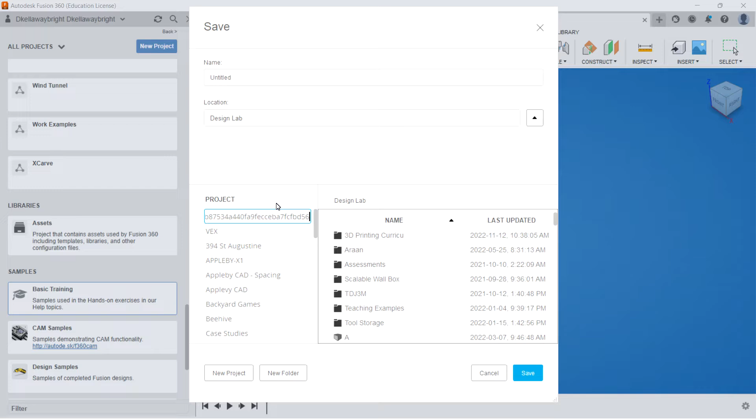I'm going to go to File and saving my empty project. And here I'm going to go into New Project, and this was called Manual Joints. Okay, and now in the location, I'm going to find Manual Joints. There we go. And maybe it has a name for me. I'll just call this my assembly here. So now I created a new project and I saved an empty file.

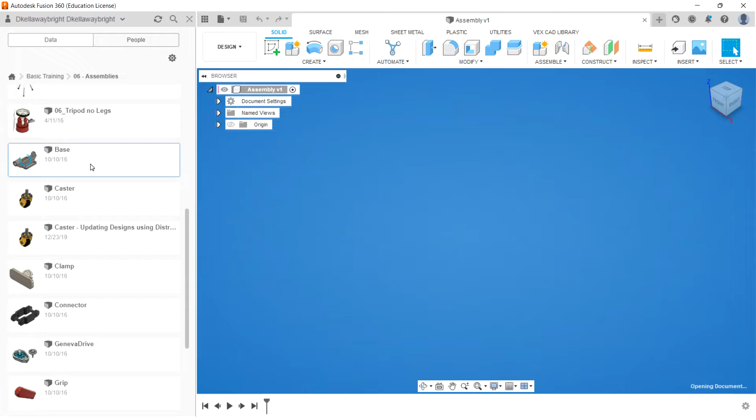The next thing that it's going to tell me is to open up base, clamp, connector, grip, lever, and shaft from the basic training 06 assemblies folder from the data panel. Here I go. Basic training, assemblies, and I can find these things. It asks me to open them. Opening the base, the clamp, the connector, the lever, the shaft, and the grip.

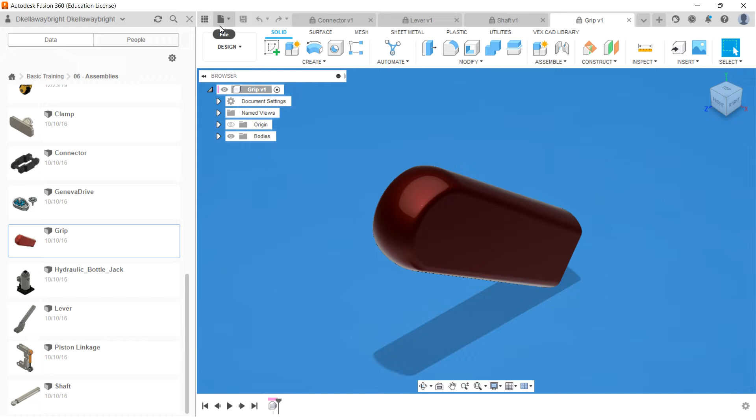And it's asking me to save each of these into my manual joints project. So I can hit Control S. Maybe not, save as, there we go. And it's going to put it right into the manual joints project. The reason I need to do this for all of them is because they're read-only, because they're from the samples.

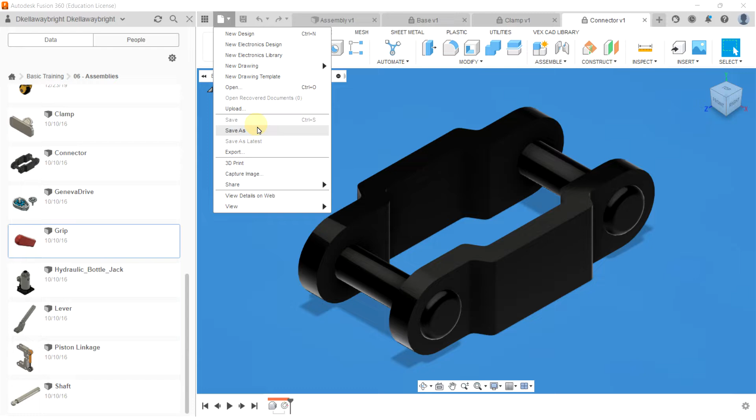So that's 2, this is 3, this is 4, 5, there's the base. Okay, and then here's the empty file that I created initially.

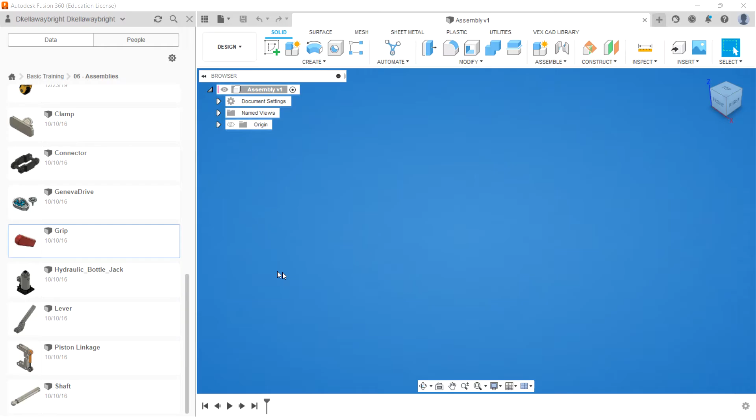Close each of the parts, open the manual joints project to open it and ensure the files are in the project. So now I'm going to go to the manual joints project. Making new projects as you go is a good idea to keep things organized. I've got the assembly, which is the empty one, and then 1, 2, 3, 4, 5, 6 parts. Okay. Double click on the manual joints project, open it, we did that. Ensure a new untitled design is open, and they're asking us to save that one, so we've done that.

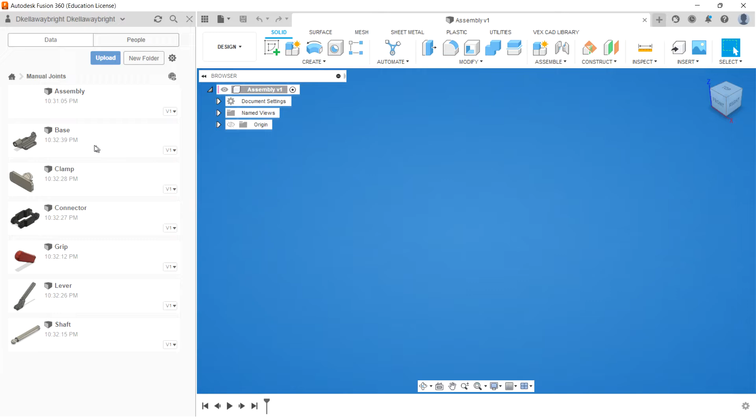So we're going to assemble the clamp and add the joints. Insert the base into the clamp joints design and ground it. Okay. Insert the base into the design. There it is. And I'll ground it. I'm going to right click on it as a component, and I'm going to go to ground. This prevents it from moving whatsoever. It's got 0 degrees of freedom.

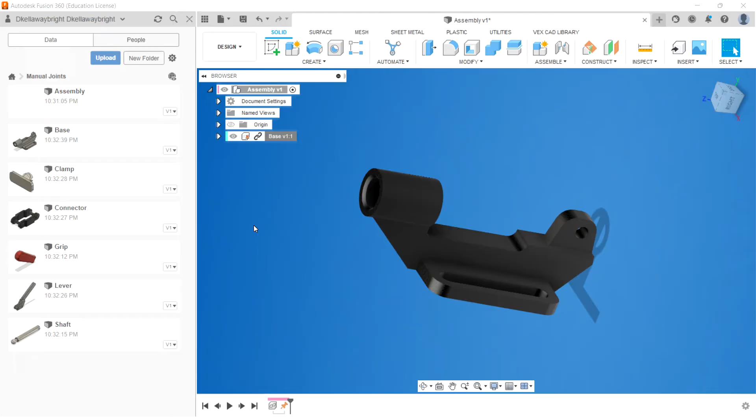Insert the lever and use a revolute joint to attach it to the base. Here's a lever. Okay. Now before I finish adding it, I'm just going to move it over so that I can see more easily the parts that I know that I need to use. Referencing the picture, I can see that I need to use this part of the rod of the lever into those 2 circles. So I will do that now.

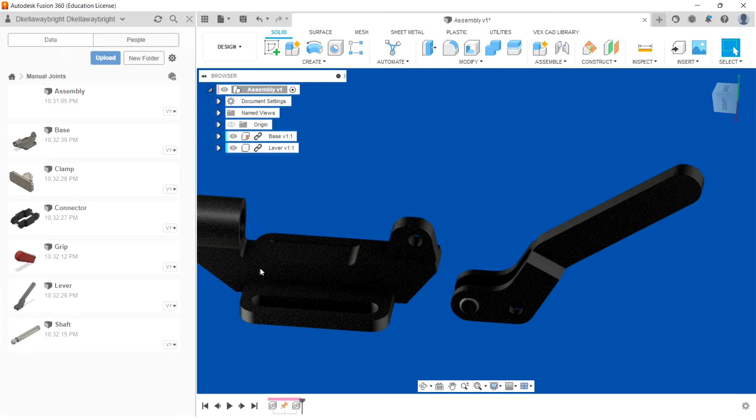I'm going to press S and I'm going to type joint. We're using a joint and not an as-built joint because we need to move this component to its final destination. Okay, I should be able to access, as I hover over the center of this joint origin here, so clicking on that component.

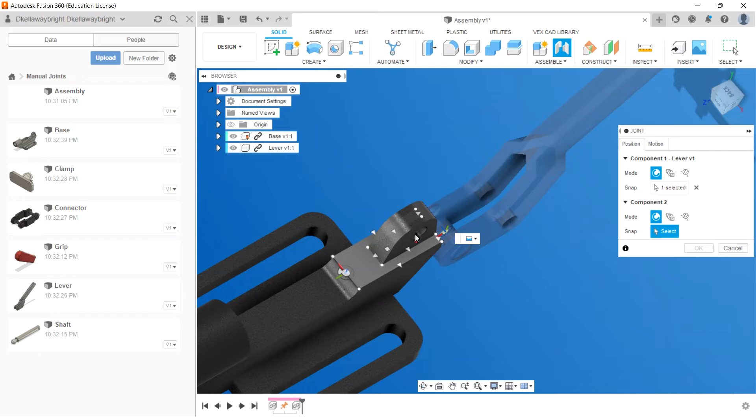And then here, it's going to go into the center of this cylinder. So I'm rotating my screen around, and I can see I can't access that center origin. So I'll hover my mouse here, I'll hold Control, and while holding Control, I can access it. Perfect, that's what we needed.

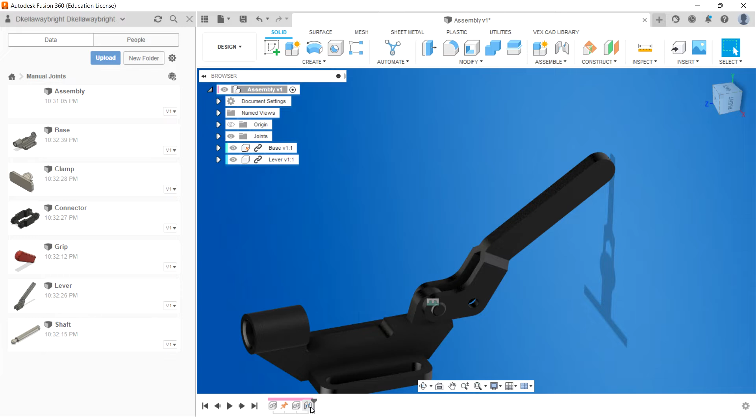Okay, looking at the picture, I noticed the difference is that ours is not flipped, so I'm going to right click and edit this joint from the design timeline. I'm going to click on flip and hit OK. Perfect. Now it's the same orientation.

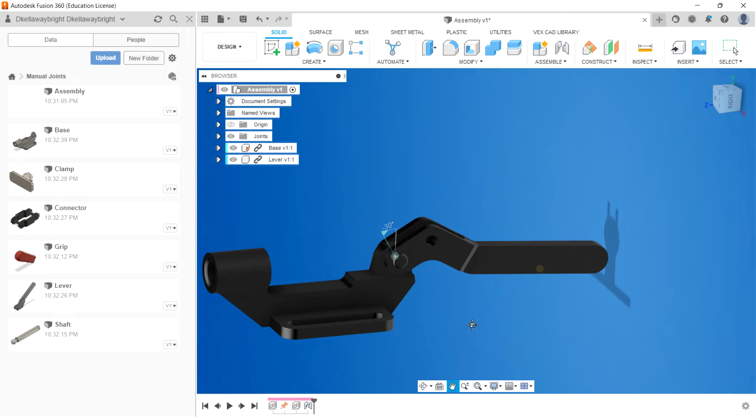I'm going to edit the joint one more time, and I'm going to go to motion, and I'm going to make it a revolute joint, because before I had it as a rigid joint because I was rushing and not paying attention. There we go. My picture looks the same. Create a joint origin midway between the open holes on the lever.

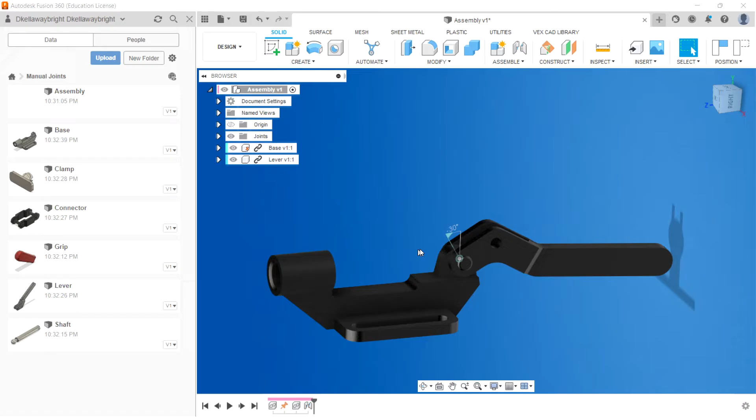Okay. So here it's asking me to make a joint origin because there's probably not one where we need it to be. So in between these two holes here, I'm going to make a joint origin. Joint origins are snapping points that we can use for mechanical animation. I will capture the position of that arm movement just for convenience. A new joint origin is going to be between two faces.

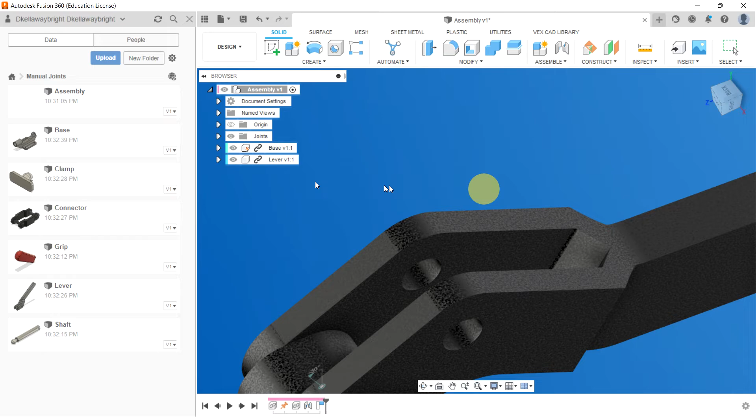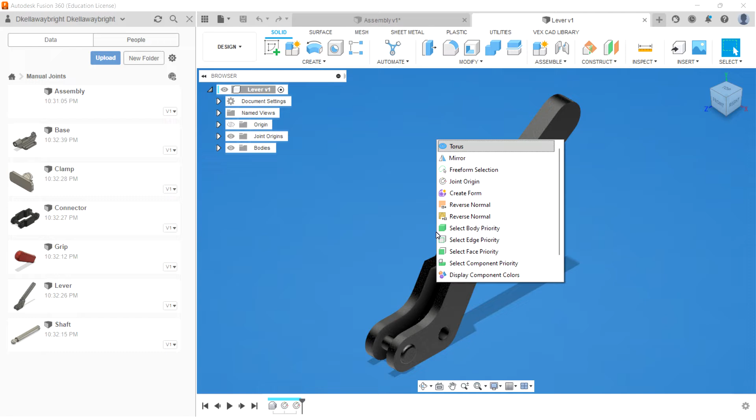And it looks like we're going to have to follow the instructions a little bit more closely. Here we're actually opening. So we're going to this lever and we are opening it. Now we can make a joint origin. Between two faces, between this face and this face. And our snapping point would be here.

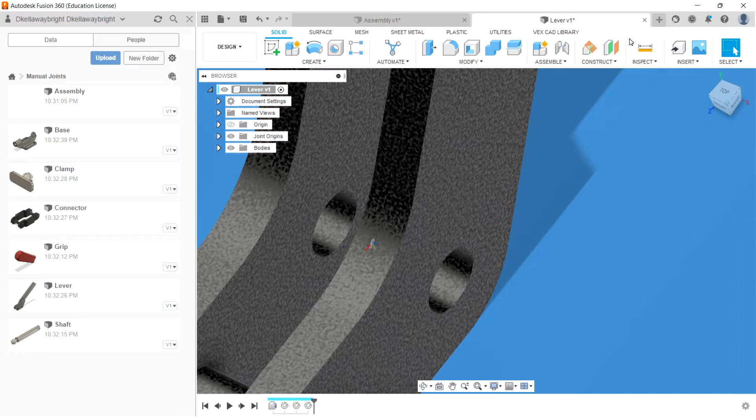Looking at the final result, this is a new joint origin between those two faces, snapped along the axis of these cylinders. Okay. Now I can close it, save it, click on this icon to reload my design, and now I've got a fancy new joint origin right where I need it.

Okay, so here it was telling me select the edge of one of the holes to define the joint origin. Check, we did that. Prepare to add the connector to the clamp joints origin design. Go back to the clamp joints design. In the clamp joints design, the lever is out of date. We fixed that. Get latest, we did that.

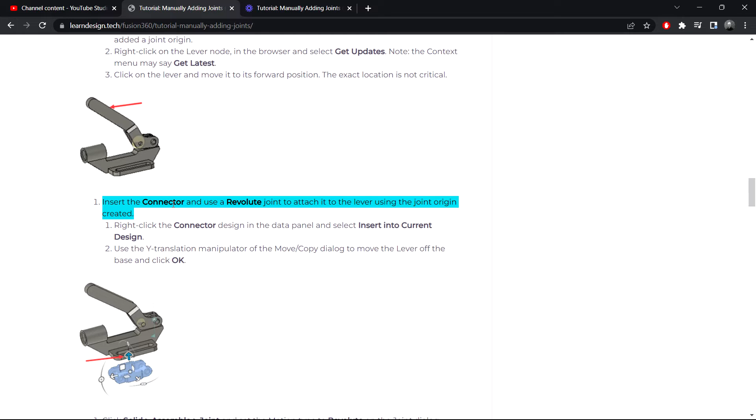Insert the connector and use a revolute joint to attach it to the lever using the joint origin created. So we're adding the connector and we're attaching it to that new joint origin, just like this. Here's the connector, dragging it into the design. As a matter of convenience, moving it out of the way for a moment and hitting OK on that move command.

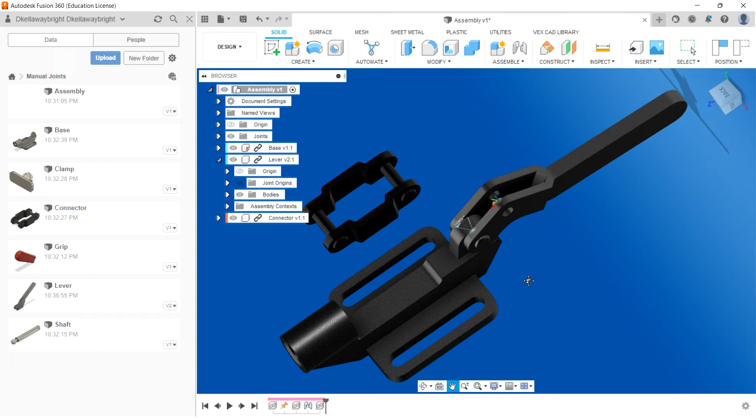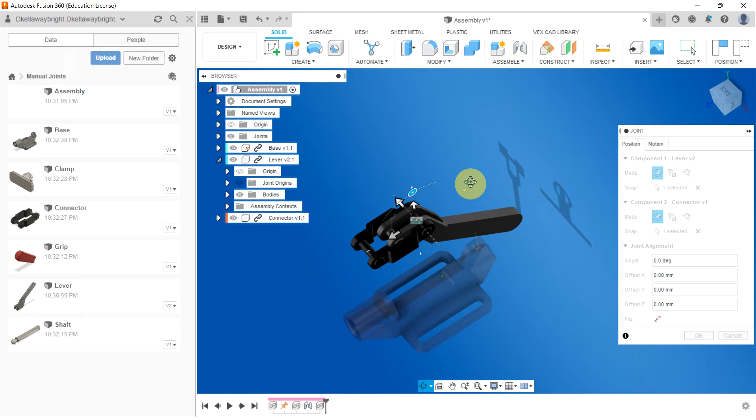Creating a joint, going between this joint origin that we had created and the center of this cylinder. Now it's moved this as a preview. That's okay because this part is grounded, so it will all get calculated out as needed. This needs to be a revolute joint, not a rigid one, and we'll hit OK. All right, so now we've got this part functioning as we would expect, and it looks like the picture.

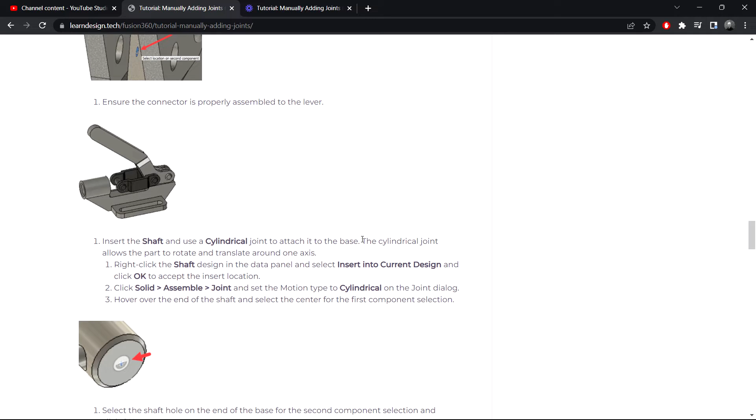Insert the shaft and use a cylindrical joint to attach it to the base. The cylindrical joint allows the part to rotate and translate around one axis. Insert the shaft. Okay, and it looks like I need to attach the shaft here to there. We'll make a joint between the center of that cylinder and make it a revolute joint. And then we'll tell Fusion we're looking at the next snapping location right here.

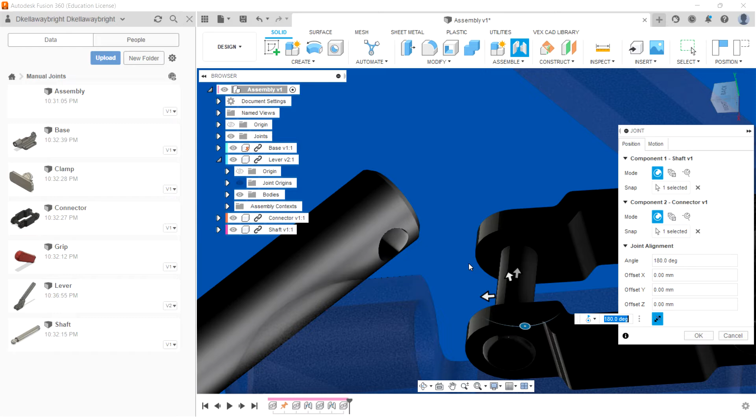Okay, so that's not the degree of freedom that we needed. Let's try it again. Let's grab this piston and let's grab the center of this again. Okay, perfect. Changing it, making sure that it's revolute and hitting OK.

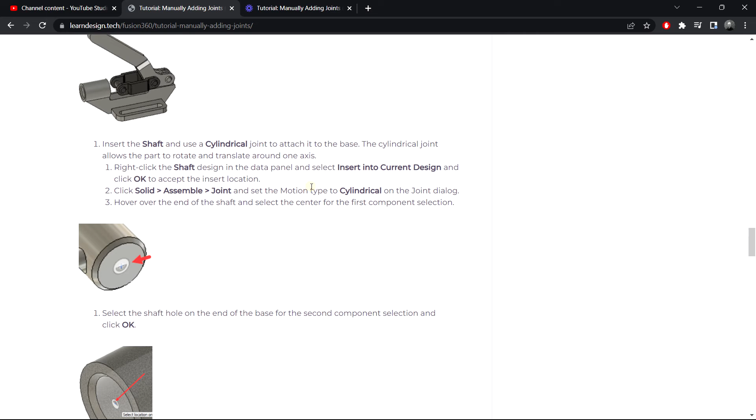Here, Fusion is asking me to create the cylindrical joint between the shaft and the empty cylinder here. So we've skipped ahead and we've done the revolute joint. Let's also add the degree of freedom that will lock this inside that area there. So create a joint

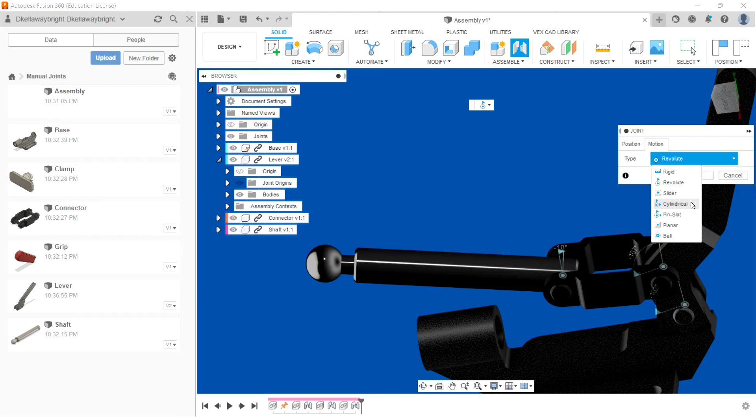and we're going to change it to cylindrical. It's nice to change the joint type first so that you can tell Fusion what to expect. We want this part of the cylinder to go into that part of the base.

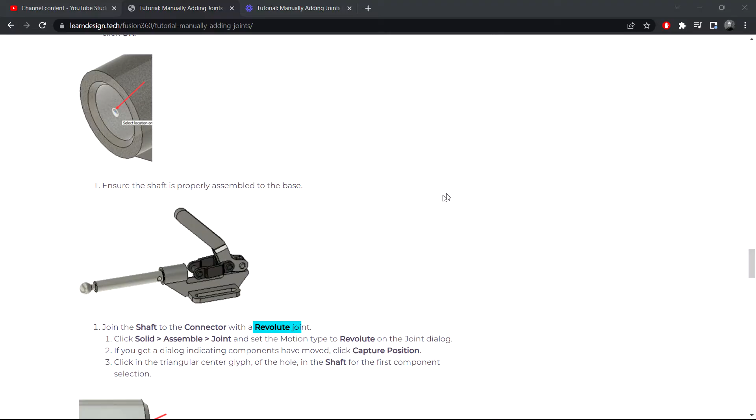Okay, easy. Now when I move the handle back and forth, the shaft can spin freely on this rod, and it can slide back and forth along this axis, just like that. Okay, so we've completed that cylindrical joint, and our part looks like this now.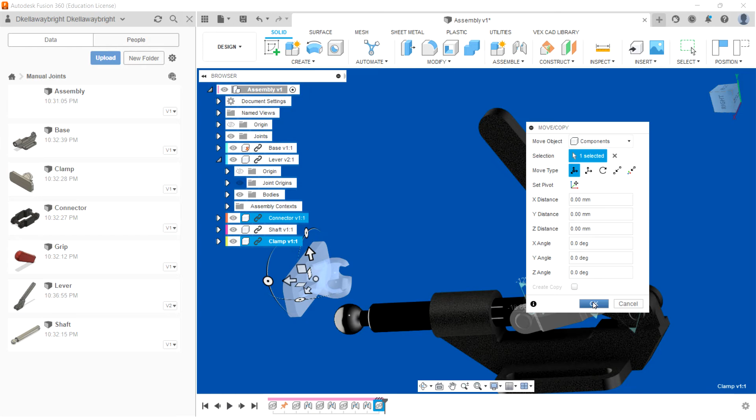Insert the clamp and use a ball joint to attach it to the base. The ball joint allows the part to rotate around 3 axes. There's our clamp. Okay. And it was asking me to use a ball joint. We use a ball between the center of the sphere and the center of the sphere.

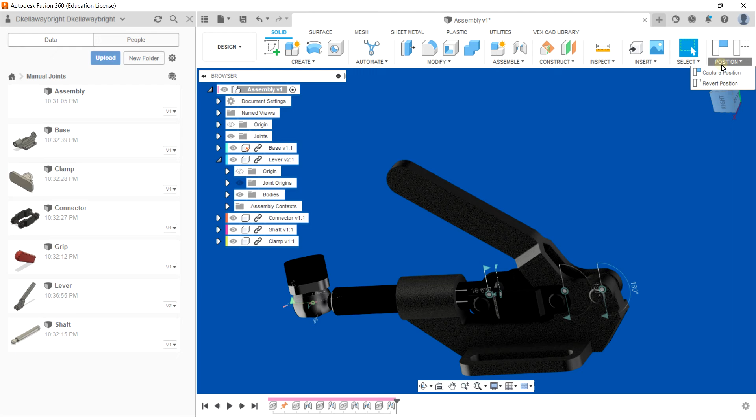Okay. Now the clamp, let's bring that back a little bit. The clamp can rotate freely around the ball joint. We haven't created the limits for this joint, so that's okay. I don't mind that that's happening. Here we will just simply revert to the original position. Okay, so that works as intended so far.

There's our ball joint. Join the grip to the lever with a rigid joint. We'll click on the grip design in the data panel. Okay, we'll insert the grip. We'll do this part a little bit slowly because I think there might be a trick to it. There's our grip. Click solid, assemble joint, and set the motion type to rigid. Okay, so we're making a rigid joint.

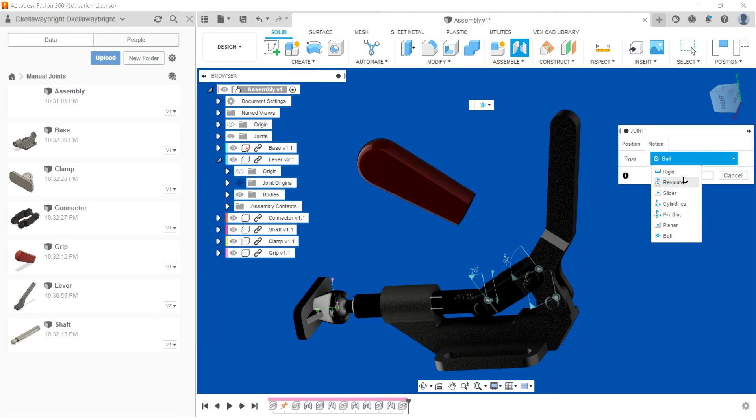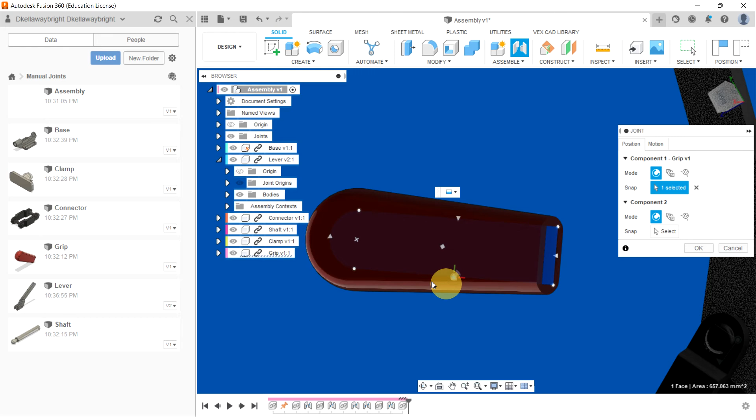If you get a dialog indicating components have moved, capture position. Click on the inside grip face, but not on any snap points. This limits the selection of snap points to only the ones on the face. Clicking on the inside of the grip, and now our selection is limited only to these joint origins. Click on the snap point that represents the center of the radius on the top of the grip. Okay, this is the center of the radius on the top of the grip.

Click on the center of the lever handle radius. That should correspond to the grip location. You select it and click OK. Okay. So I've clicked it on that face, so this should really be right here.

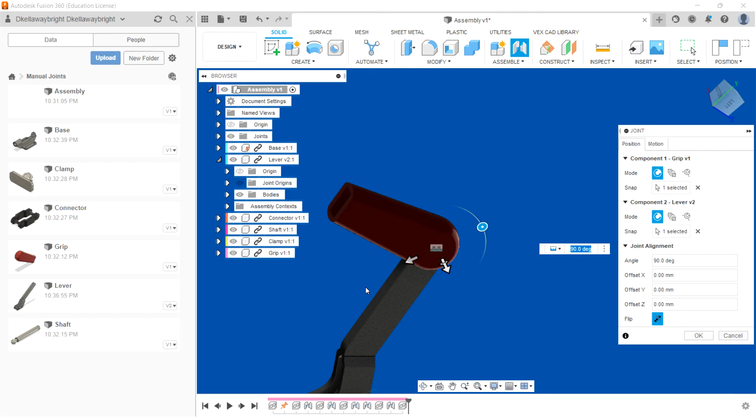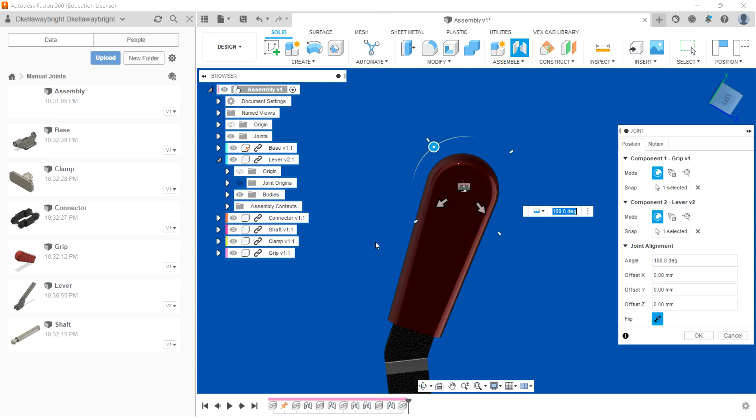Ensure the grip is properly assembled to the lever. Well, it's not. So what should we do? Let's see if flipping it changes anything. No, it doesn't, because that just flips the face there. I want to rotate this a little bit to repair it. This is called a joint alignment, and that's no problem. You can fix it just like that. Perfect. Okay.

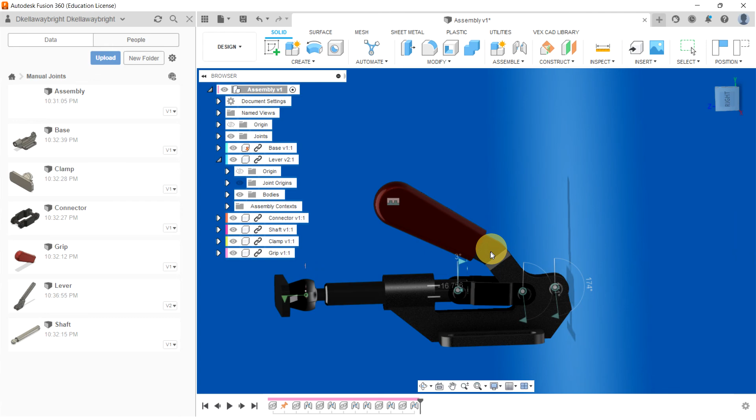So that's the end of the tutorial. We can check out our final motion when we click on our handle. There we go. Now, as a bit of a bonus, because we find that this handle goes too far, and the handle is really the input to the chain of motion, we should limit the motion of the handle so that it can't go any further than what would be physically possible. Somewhere around here should be our maximum.

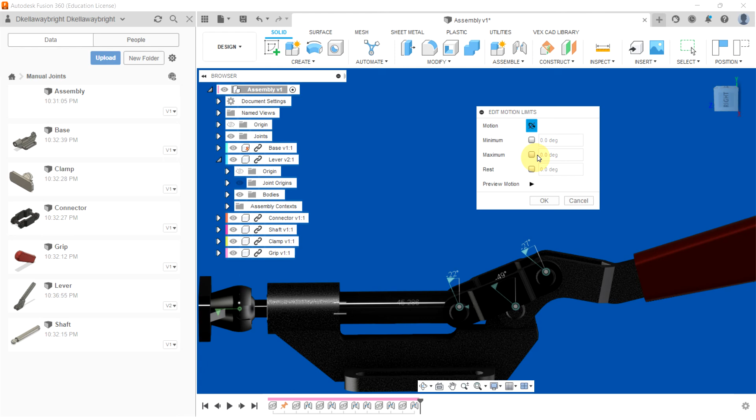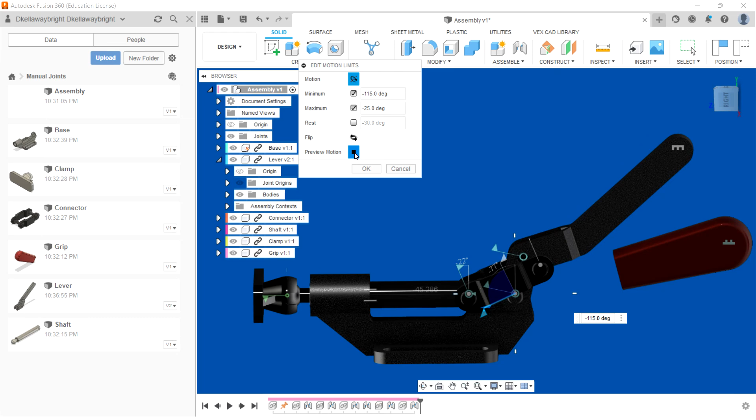So thinking about the joint that controls specifically the motion of this handle, it's this revolute joint. So we're going to right click on it, edit the motion limits, and use the minimum and maximum limits to restrict the overall motion of this joint. So we're going to say it can go as far as here. We might have to check to see the consequence of this, but let's try here. We can preview just the handle, but we'll have to hit OK and see what happens.

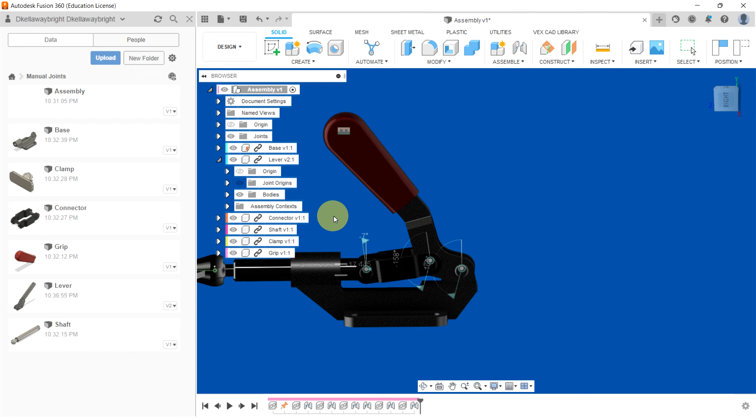Now, I can't physically drag the handle beyond our limit, and I also can't push it further than our limit. I'm going to edit this one more time, edit motion limits, because I think that it really should be even further now that I see it. Okay. There we go. So I can't push the handle further forward. I can't push it further back. That's good. That's what I wanted to check on. That's the completed tutorial.